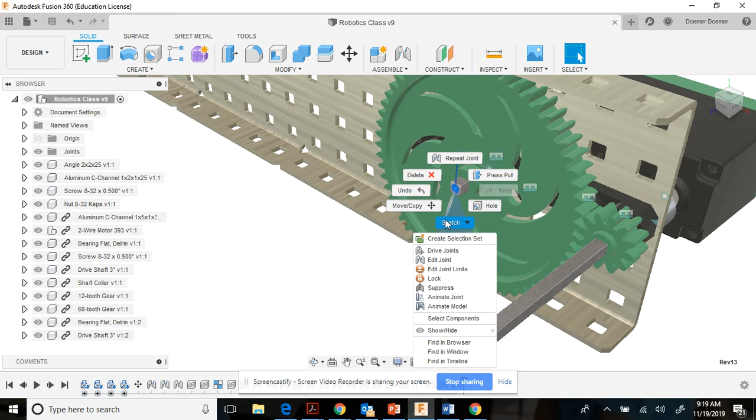In the previous day's work, we meshed an existing 12-tooth gear into a 60-tooth gear. What this accomplishes is every time this small gear turns one full rotation, it just barely turns this larger gear a little bit at a time.

So what you accomplish with that is torque. Now, if you wanted speed, you would just change these motors out, switch their position so that every time the motor made one revolution, it would spin the smaller gear many times. In this case, I believe it is 5 times.

So we have a 1-to-5 gear ratio for torque with this particular orientation, and it does torque this gear way down, so it would move very slow, but it would have a lot of power.

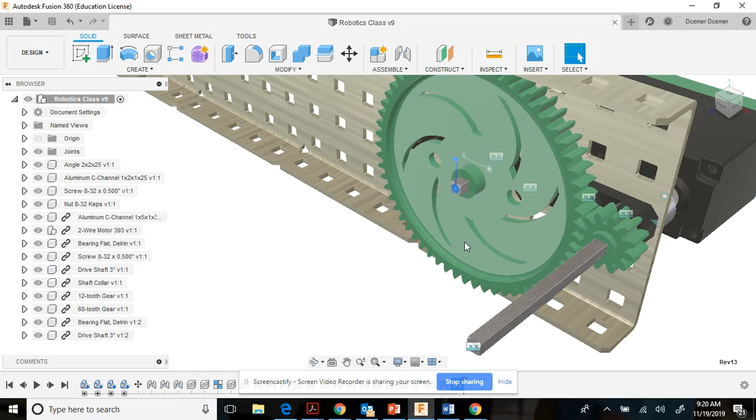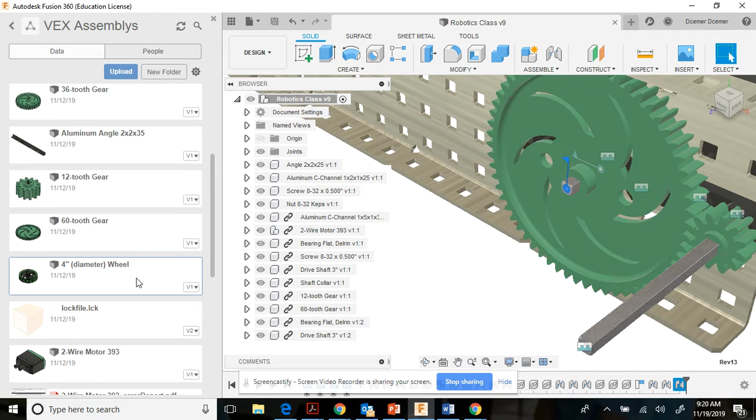Today, we're going to move away from that gear and go back to finishing up our previous attempt at a wheel, a drive wheel, and we'll also need a shaft collar on that. So we're going to use the 4-inch diameter wheel, and we'll drag that into position today. Once you have the 4-inch diameter wheel in place, you will also need a shaft collar to cap that off.

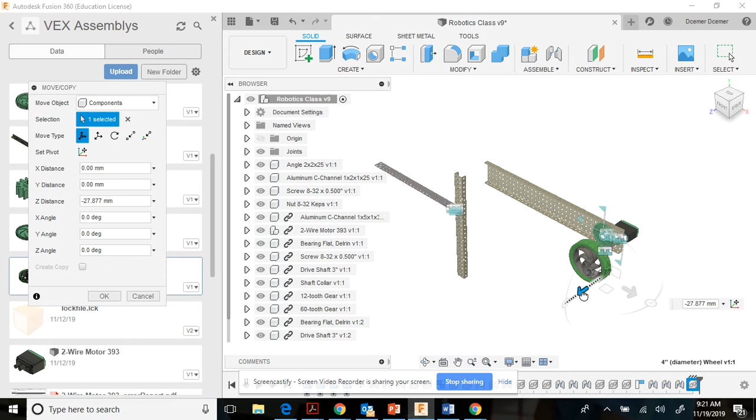So once again, I like to move everything close to my work area as close as possible so that I can zoom in and see. We need a shaft collar to cap that off at the end. So those are just the two pieces of assembly that we'll be working with today.

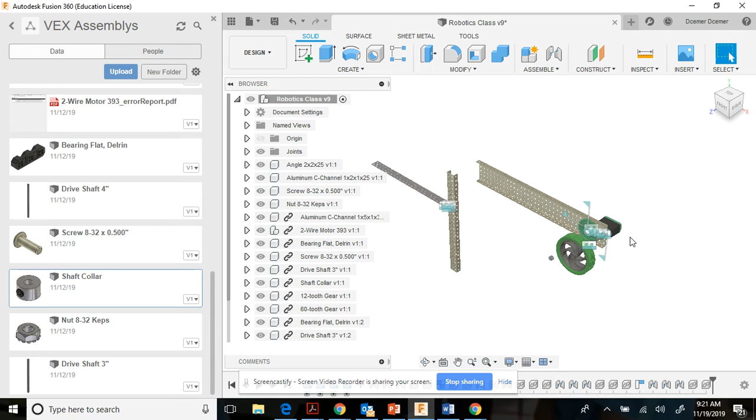And we're going to zoom in close enough so that we can see the work that we need to do. Close out the data panel so that we have more visibility of the work area. And we'll also rotate.

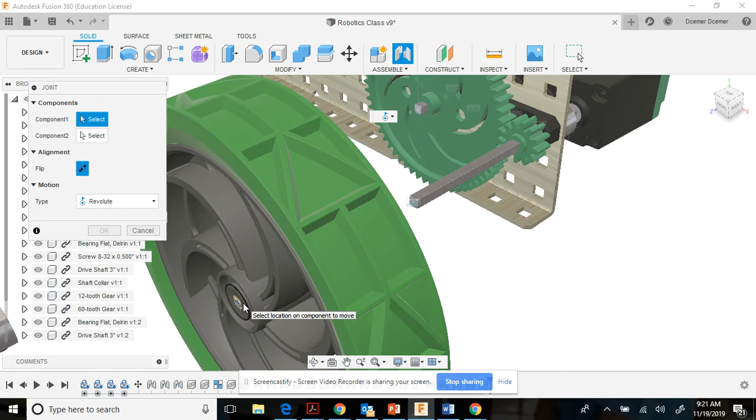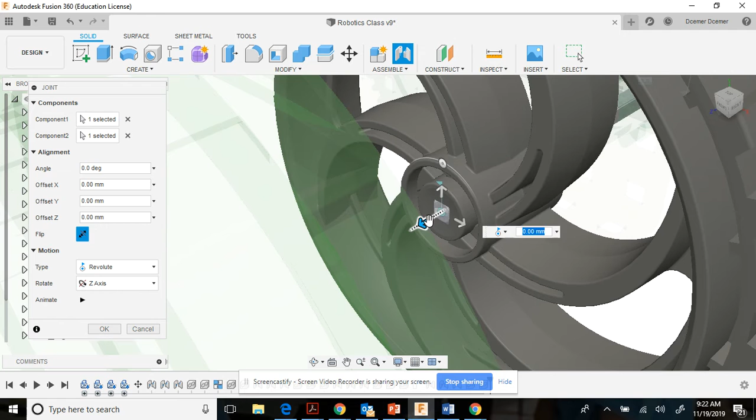Now we're going to create a joint based off of this circular point on the wheel right here, and we will match it to the circular endpoint of our drive shaft. And zoom out just a little bit so that we can set this slider right here and give ourselves room for a shaft collar later. Press enter when you're done.

And of course you can see that the tread came loose from the wheel. This happens because it was not set as a rigid group. So we're going to undo that operation.

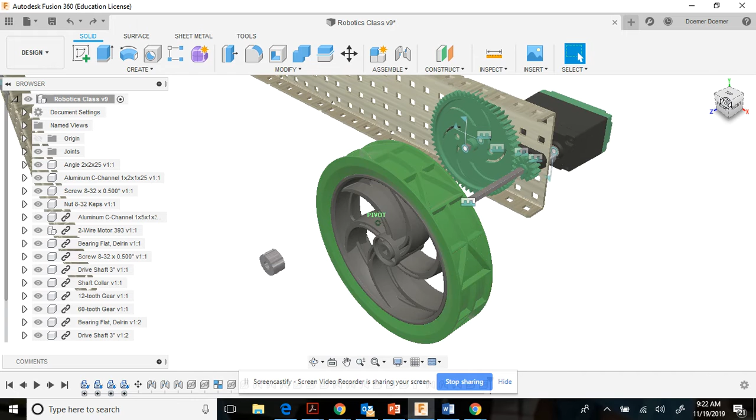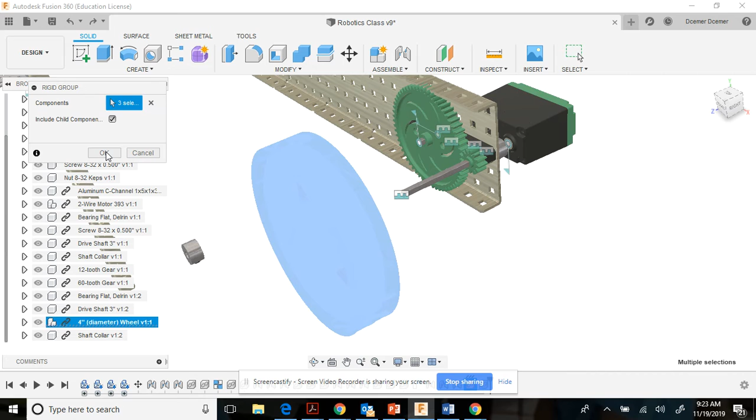And we will change our rotation just a little bit, and we will use this particular item from the browser, from the assemble menu, and say rigid group. So that locks all of those components together. If we say OK to that operation, and then zoom in enough to repeat our last attempt at a joint.

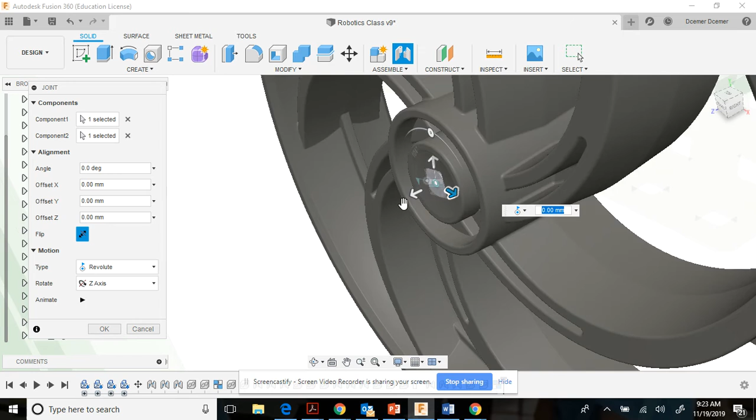We're going to use the same two joint origins, and you'll notice the difference right away. Once we bring the slider back just a little bit, press enter, it moves the tread, the entire wheel at the same time.

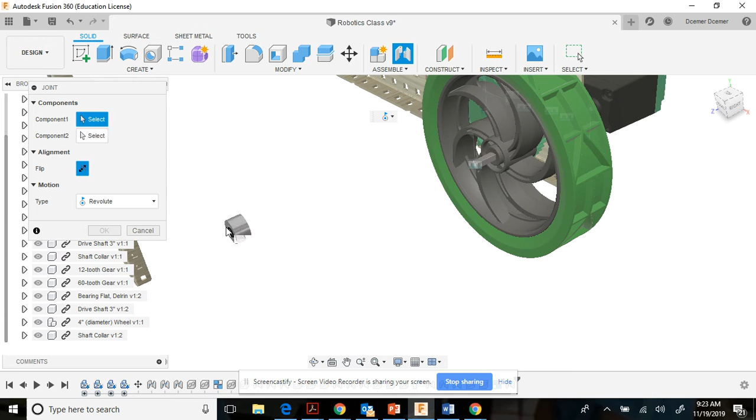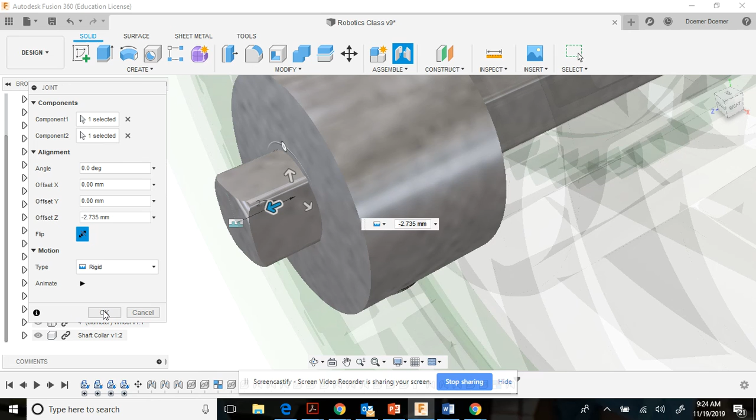So finally, to put a shaft collar on the end of this, we will join again and base it off of the same center point and move into the shaft. Use a slider to bring it up to the edge of the wheel. Change from a revolute back to a rigid because you want that shaft collar to be locked tight onto the drive shaft. Press enter when you're done, and that would complete today's work.

Once you have on screen the same thing that I'm displaying right now, I will check you off.